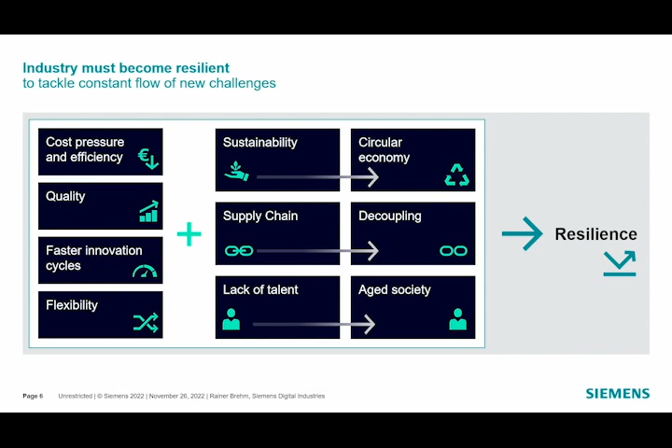When you look at automation, in the past, you automated because you wanted a better cost position, to be more efficient, or because you could have higher quality by automation, a faster time to market, or more flexibility. And that's still valid. You still do automation, you still strive in manufacturing for higher productivity.

But what's new? Three new aspects, and we talked about that today. Sustainability. I strongly believe there is no sustainable future without electrification, automation, and digitalization. And in the panel before, we discussed purpose. I strongly believe we can engage young talent working in industry, working in manufacturing, because we are one of the key enablers for a sustainable future.

And we can do that by reducing resources needed, by reducing the CO2 carbon footprint, by moving manufacturing closer to the consumer. And we also get talent for that.

Just to reflect on the last panel, I had people coming from Google, AI talents, and I was asking them, well, why do you come to us? We work using AI for optimizing processes, for example. And they said, well, if I work with Google, I'm using AI to put the best advertisement somewhere on a web page.

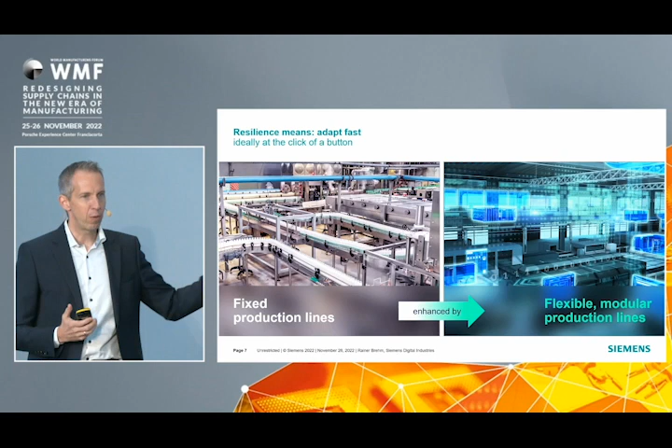Now, one topic is you need higher flexibility to do all that, and you need to walk away from fixed line production. This was kind of Henry Ford, introducing the conveyor belt. You need to go more and more into flexible and modular production lines.

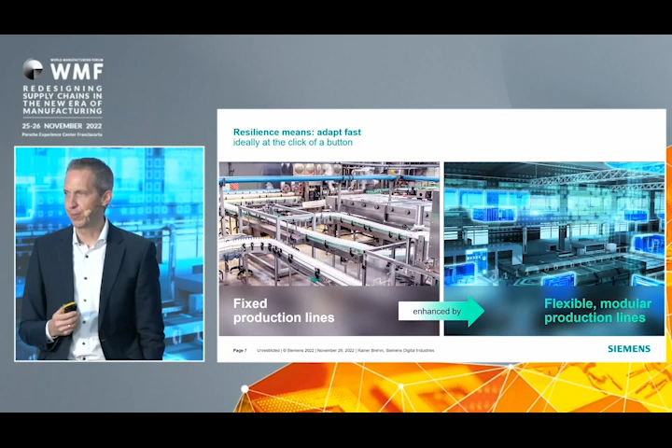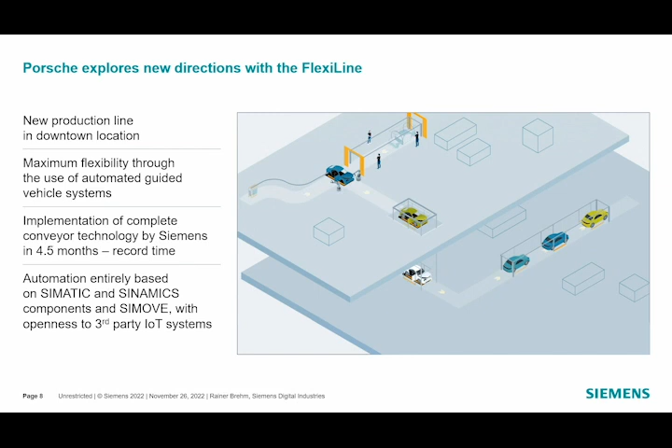I'll give you one example, because we are in the Porsche Experience Center. This is the Porsche Taycan manufacturing, the first electrical Porsche. You see some Taycans outside. Siemens did the complete manufacturing, the last line, and Porsche went away from a conveyor belt, used a lot of AGVs. It needed to be done in Zuffenhausen downtown, in a two-story building.

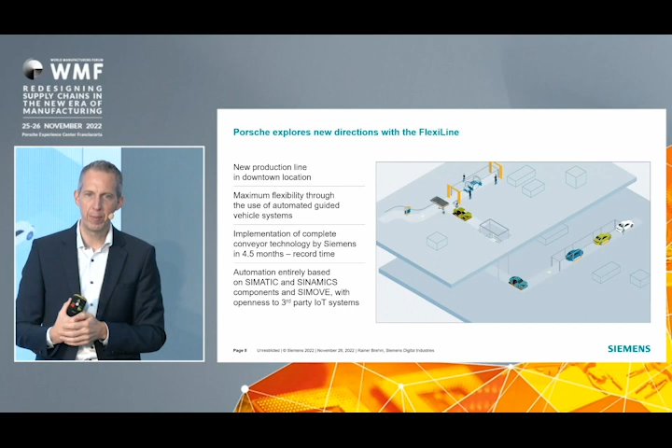So we did all this automation, and Porsche said, I want to move away from regular conveyor belts, I want AGVs, I want to change the speed of production. I want to pull cars out in case I need a special treatment, a special color, a special interior. I want to move cars out if I see a defect. I don't want to repair the defect at the end of the line, I want to repair it directly, so I want to move it out.

So a lot of flexibility was done here with Porsche on the Taycan manufacturing, which you see outside, one example.

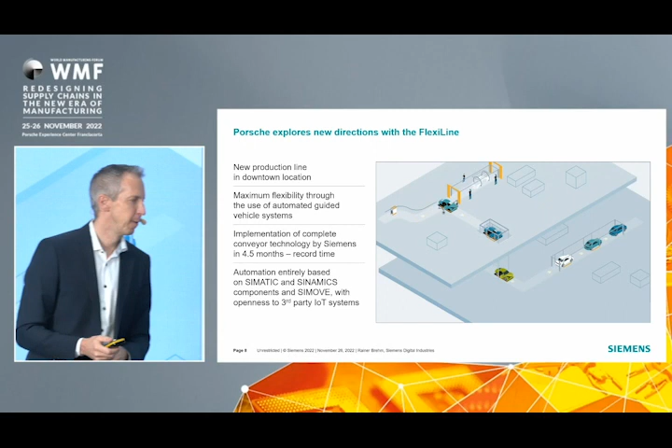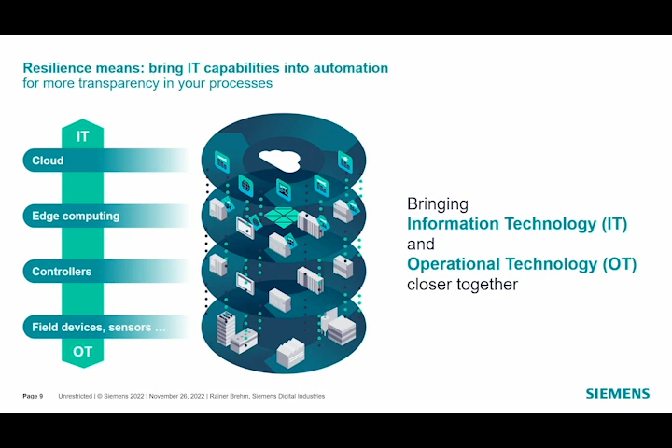In order to do that, we talked also about needing real-time data, and therefore we need much more IT technology, which is complex. This was the last panel discussion, but we need to make it usable in the manufacturing world, the OT world, and cover that complexity and make it accessible. Because in the future, we go away from 'you never change a running system,' which is what normally happened. You switch it on, it runs, you don't touch it.

You will go away from that, and have a continuous deployment of functionality to an OT system. In the software world, that's called DevOps, state of the art. In the OT world, I don't see a case where a customer is really deploying constantly new functionality to a shop floor, but we need to change that. For that, we need to connect it and use the data much more, doing data analytics, because a lot of data is simply not used.

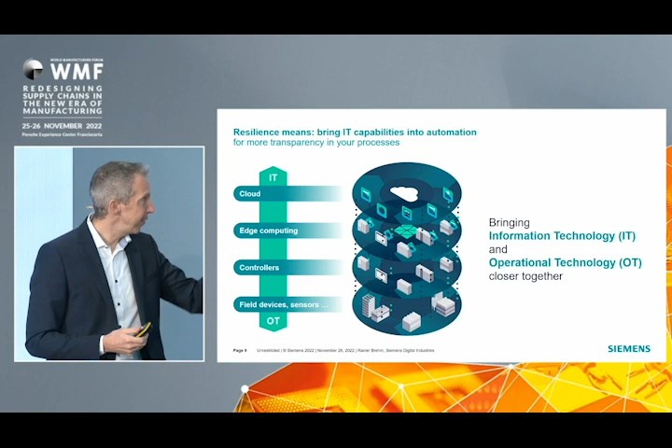So that is in manufacturing. Now looking at the supply chain, we need to connect much more supplier, manufacturer, and customer, having a quite holistic view. This morning we heard about activities like Gaia-X, there's topics like Catena-X, and Manufacturing-X is something coming up, connecting the supply chain. I'll give you three examples now on these main topics, how we could do that.

One is sustainability. We know that's a very important topic because manufacturing has 33% of the global energy consumption. Only a small part of the material is really recycled, and it also has a big portion of the global CO2 emissions. Andreas, I think you talked this morning about how you get transparency, for example, on the CO2 emissions across the complete supply chain.

In my factory in Amberg, we had the same question. So how do we do this? Because our goal was to produce a CO2 neutral product. And then we have electronic manufacturing, we have pick and place, we do PCBs, we do soldering, and so on, like we do in electronic manufacturing.

We figured out that only 10% of the CO2 emission is done in our factory. The other 90% is in scope 3 and scope 2 of the supply chain - the PCB board itself, the plastics for the housing, the components, the metals maybe on a heat sink - that is 90% of the CO2 emission.

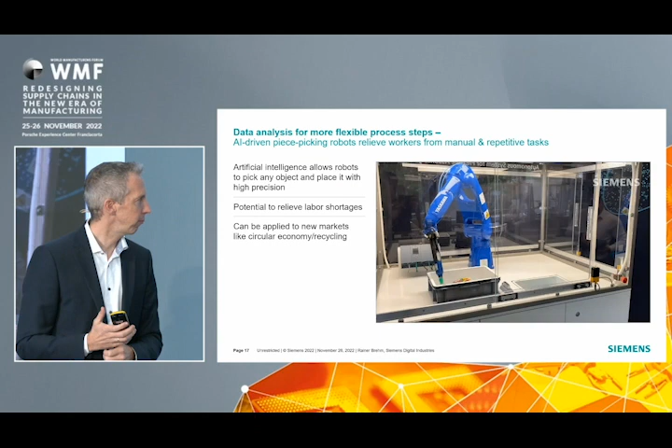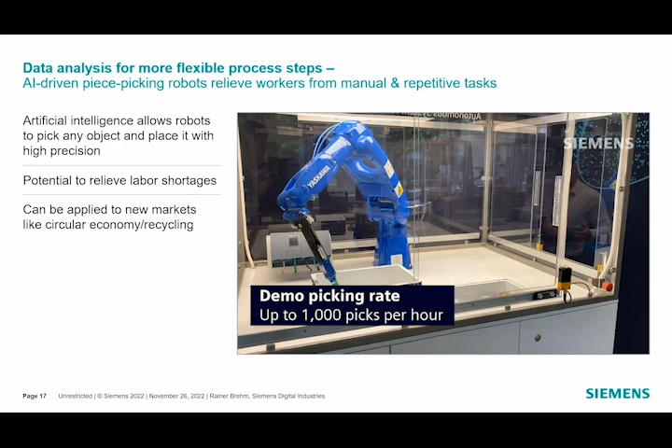One example I showed you was the battery manufacturer. Can we automate something which you couldn't automate before? Let me show you a real example. Siemens doesn't build robots, but there is a small gray box—this is a PLC, a controller. In that small box, there's a very sophisticated AI algorithm. This is also what Ugo said in the last panel discussion.

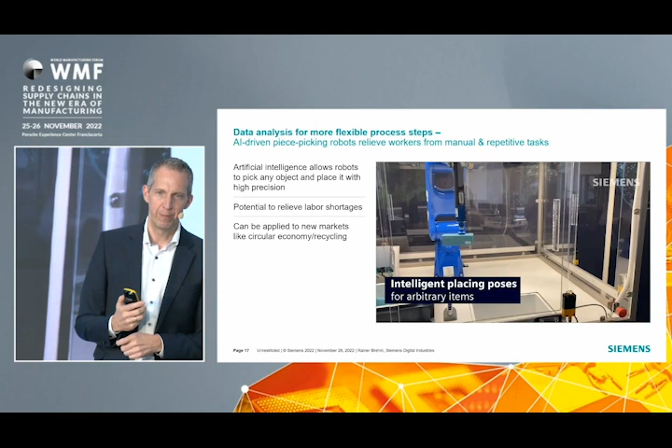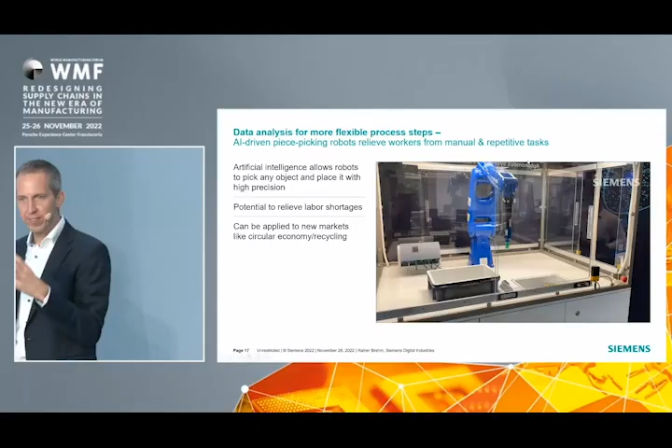Working with Berkeley, with the university, what we teach this robot is not grasping one specific thing. What this robot can do is have the skill to grasp something—the skill itself. So that robot gets a skill. That means if I tell this robot to grasp this thing, and I put it there, the robot will be capable of grasping it, even though it has never seen that thing before, even though it was not trained on the digital twin of this product. That robot has never seen that device before and can still grasp it. Why? It detects the device, it has the skill of how to grasp, and with that I can automate something I have not considered beforehand.

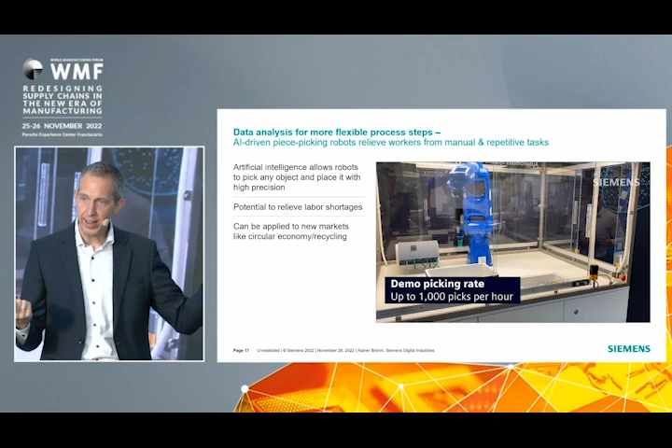And with that grasping ability, think about Amazon fulfillment centers—how many people are there taking something out of one box and putting it into a new box?

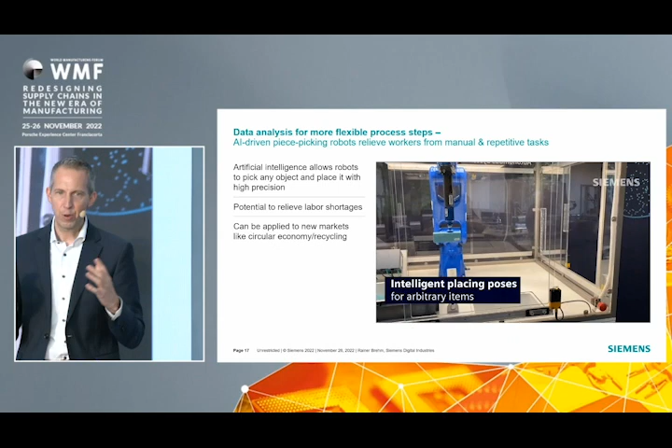Take an end-of-line consumer packaged good. There was Thanksgiving, and maybe Procter & Gamble had a special edition of a product that was only on the market for one week. You simply can't automate this completely - it's all manual work today.

With that kind of technology, you can suddenly automate this because you don't need to program the robot. It's very easy - a lot of people are capable of programming a PLC. You program a PLC and the skill is already pre-trained inside. Then you just want to grasp this one, put it there, and it grasps.

So you go away from automating what is highly repetitive and known, into automating in the future something which is non-repetitive and not known.

And with that, you move from flexible and modular lines into more of an autonomous factory. Autonomous factory does not mean there are no people - there are still a lot of people, but the factory can react much more independently to changed circumstances. Let me give you one example.

The Porsche Taycan was still produced flexibly because of a huge AGV, but the process was kind of pre-programmed. So if you want to change where the car goes, somebody needs to interact. In the future, you might not do that anymore.

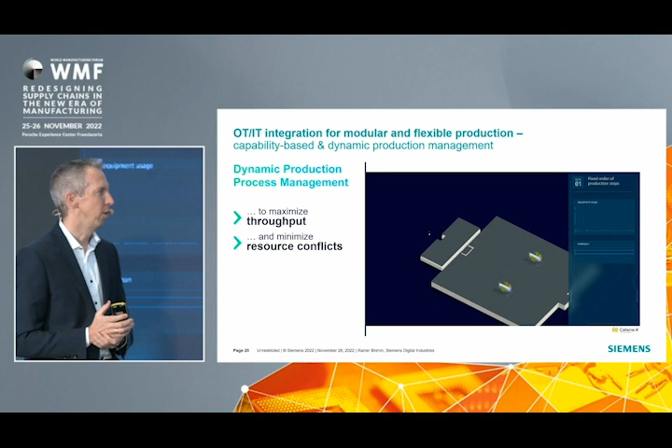This is one example we're just bringing to market. You have three different products, and currently the utilization of the machine assets, shown in the bar, is not optimized because normally you have a fixed way through the factory. In the future, these kinds of boxes are machines and they have skills.

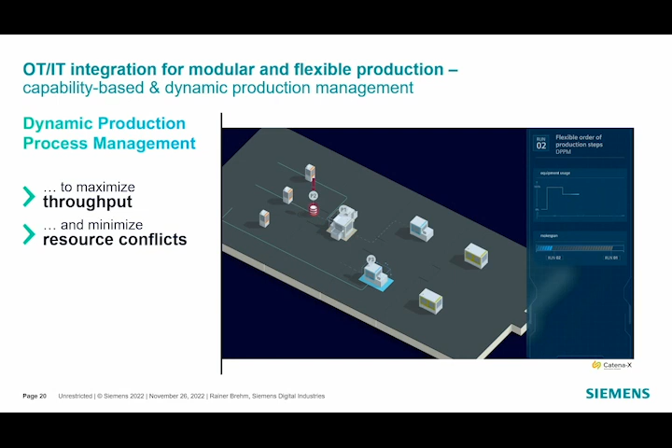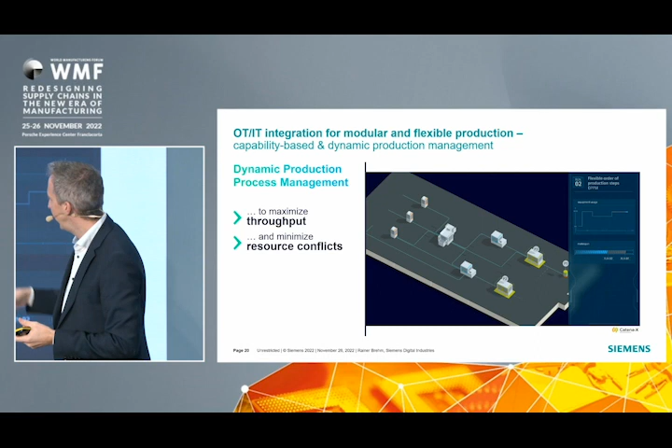You have a product, and in the fantasies of Industry 4.0, that product has a bill of material and bill of process, and it knows what it needs. The way the product moves through manufacturing is then determined in real time - it's not pre-programmed. You have AI algorithms that navigate a product through a manufacturing site, through different machines having skills.

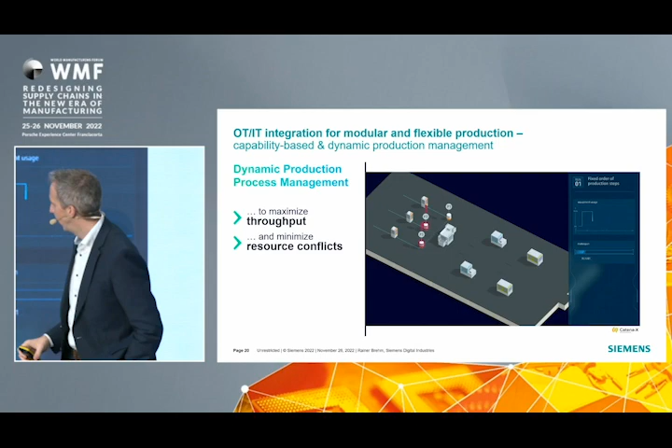With that, you are much more flexible, because if suddenly one machine stops - has an error, doesn't have material, or is on maintenance - the system in real time says, okay, I don't go to this machine, I go somewhere else. You make it more flexible.

If you want to change the product you want to produce and you don't have the right skills in your machine park, you don't need to change the complete production line. You take out one of the machines or enhance it with a skill, and your factory is ready for a complete new product line.

So skill-based automation with real-time capabilities is going to be the future, making factories much more flexible to react to supply chain constraints.

And with that, maybe in the future, it's possible that this small lady can build an individualized robot. So she dreams it, the father takes an iPad, takes a photograph, and you press buy.

Maybe in the future, a factory is capable of producing automated lot-size-one products, scanning the required materials, putting a production schedule together, maybe 3D printing parts of that unique robot, and then delivering it to the child. That might be a vision, and that might be a reality in 20 or 30 years.

But the future is going there. Digitalization, the use of product design and realization, and the use of new technology will lead the way to more and more autonomous operation. And that makes us much more resilient in the supply chain as well. Thanks a lot.